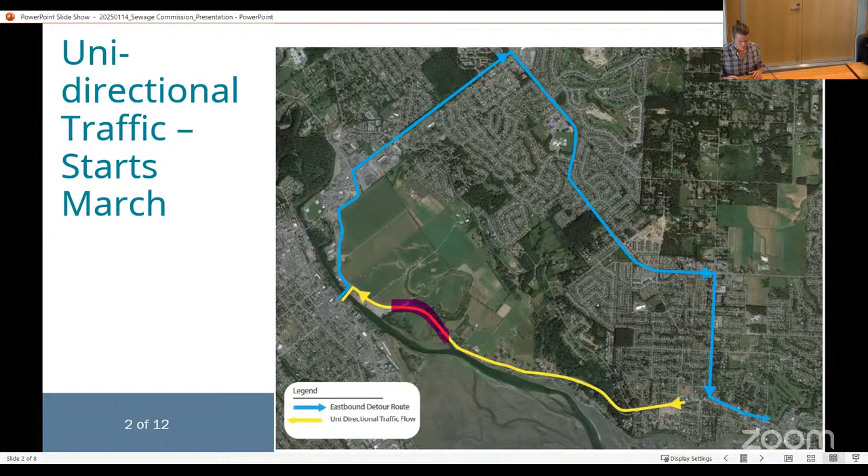One of the recommendations of the report is focused around Back Road. There's obviously been a huge amount of communication around ensuring that Back Road is not used as a detour route, to mitigate additional traffic from people trying to avoid the official detour and using Back Road instead.

When we were communicating out to the public on this, we had planned to close the intersection of Glacier View Drive and Comox Avenue. This is a snapshot from our approved traffic management plan. One of the recommendations is to delay that road closure at Glacier View Drive and Comox Avenue.

When we first envisaged this, we expected to be working up on top of the hill there at the start of the commencement of the unidirectional traffic. Now that we've adjusted the construction sequencing to start our work at the far western end of the corridor, there is no construction need to close that intersection.

I'm sure you're all aware that we'll be building a roundabout up at the top of the hill later this year. But until our contractor arrives at that location, if we close that road in advance, we'll be severely impacting the ability for Comox First Nation to flow back and forth between the two halves of their community, as well as for other folks navigating that area.

Closing roads where there is no nearby construction will cause a lot of angst in the community. So there's a recommendation to modify the approved traffic management plan to delay the need to close that intersection until either we need to for construction reasons, which we believe will be more like May or early June, or if the shortcutting through back road becomes an issue, at which point we would close it to reduce the flow on back road. That's the main recommendation in the report.

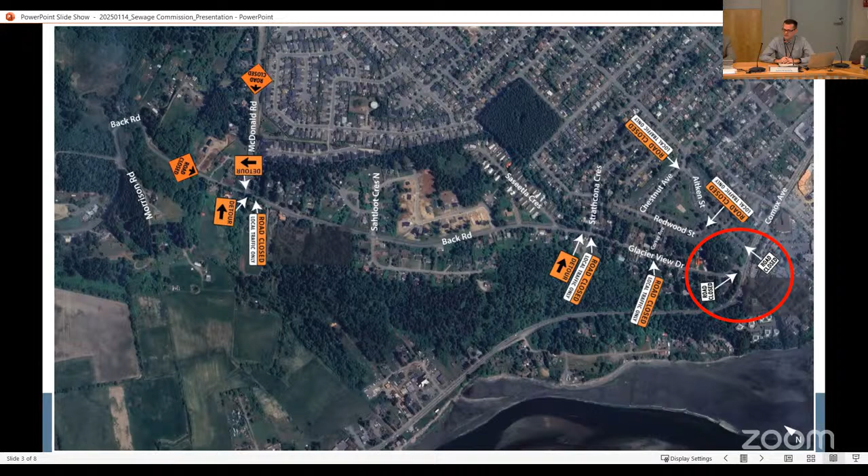May I add to that? We will be providing objective answers to those concerns as well. So, for example, if a concern is raised from a resident that lives on a certain portion about increase in traffic, we can say, we have models to suggest that it has increased by 30% where you are, yes. But the traffic has actually not increased by that same amount at the other end where we were proposing to close the road. So that traffic is actually flowing past your house up McDonald, for example, and closing the road at Glacier View Drive and Comox Avenue would not have that desired effect. So we will have very objective data to respond to concerns from the public. It's not a matter of us being very wishy-washy on all things. It's a matter of not setting a very hard trigger in the sand for implementing something that will provide more pain than gain—that's the rationale.

Thanks for that. And Director Cole Hamilton.

Yeah, thanks very much, Chair. Building on that, I think the CAO's answer was roughly what I was looking for. I'm just hoping that, obviously it's not a quantitative process, but if we can get a clear sense of what the qualitative factors are and what we're going to be looking for—I think we just want to show that, while we don't have a number in mind, we have thought specifically and clearly about what we're looking for, what we're looking at, and when we'll take action. Otherwise I think it risks being viewed as arbitrary or too subjective by members of the public. So having those talking points and listing out the qualitative factors would be really helpful to communicate this. Thanks.

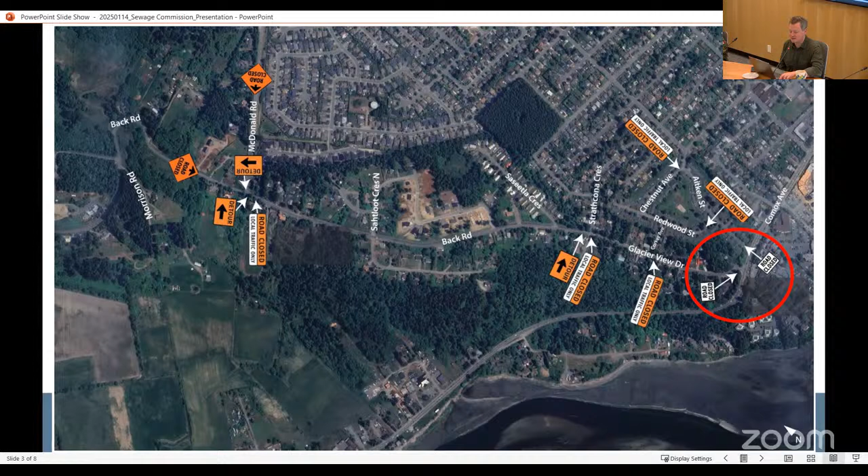Thanks for that, Director Swift.

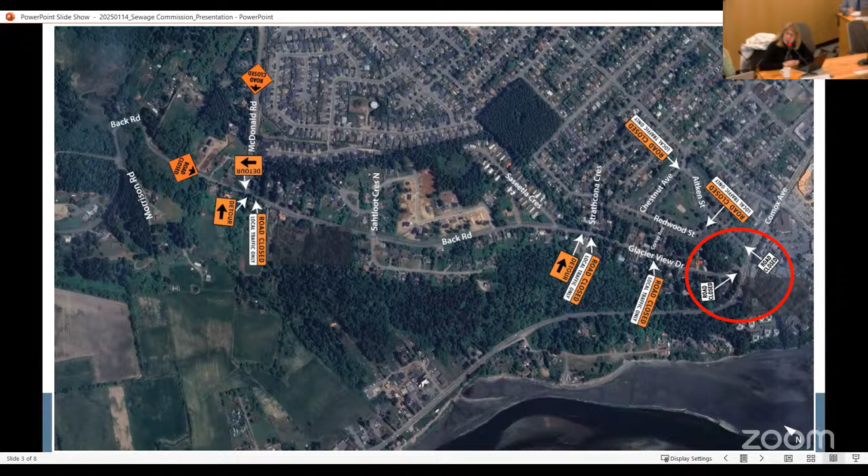I'm just wondering if I could have a reminder about how long we're anticipating the traffic to be unidirectional.

So the original traffic management plan contemplated for the majority of 2025. At this stage, we're only starting in March, so we're starting a couple months later than expected, and it is planned to run through till the fall. We are expecting to complete our force main work by the end of summer, but there will be other works, paving, final works, as well as the roundabout up at the top of the hill, which delay that into the fall of this year. So it's March until, say, October in the current plans.

However, within that larger time, you will have, for example, in March and April, you'll be able to free flow back and forth on the eastern end. And then after May, you'll be able to go free flow from Courtenay up to IR1 and back continuously. So there is some nuance, but for the general public doing the circuit, if you're coming from Comox to Courtenay for work, it will be March until October. And if you're going from Courtenay to Comox, you'll be going the Ryan Road Lerwick route as of March.

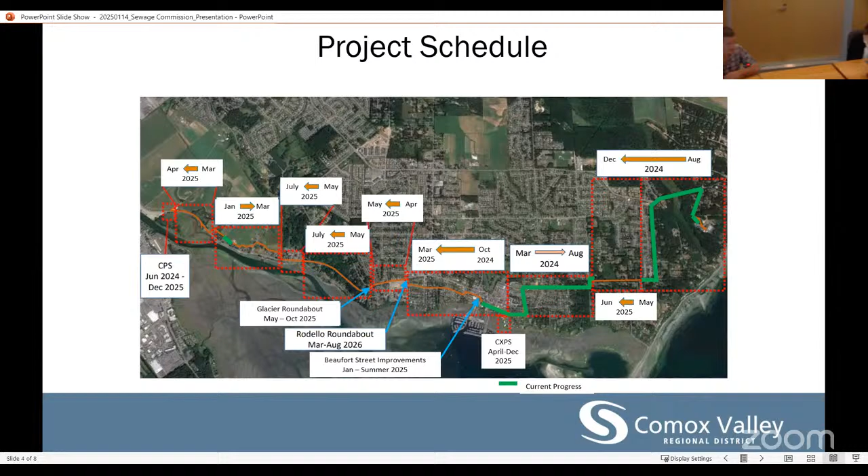Yes, and that is addressed in the report. We have approached Comox First Nation about this change to the traffic management plan, because this specific closure at Glacier View Drive and Comox Avenue really affects them the most, since you could have all the traffic flowing up McDonald and going around if it's closed. So they have indicated they're supportive of leaving it open, as long as we have the ability to react if they are saying this is becoming unsafe. We're seeing a huge amount more people coming through the reserve. So yeah, they have had input in this, and their request is just that we are able to react relatively quickly if they identify a safety issue in the reserve up on Back Road.

Thanks. All right, thanks, Charlie.

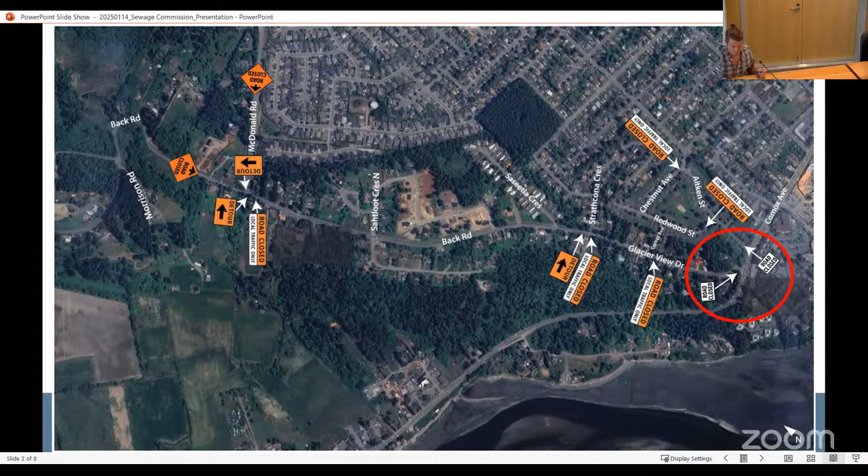No more questions or comments, so we'll vote on receipt. Is there anyone opposed? That's carried, and we have a recommendation that the traffic management plan as outlined be modified to delay the closure of Glacier View Drive and Comox Avenue intersection, and further that the CAO be authorized to implement the intersection closure prior to that if needed. Moved by Grant, seconded by Swift. Questions or comments, discussion? Is there anyone opposed? That motion is carried. Thanks very much, and thank you, Charlie.

And we shall move on to item number 5, the sewage conveyance project construction progress dashboard. A motion for receipt, please. Moved by Grant, seconded by Cole Hamilton, and back to staff.

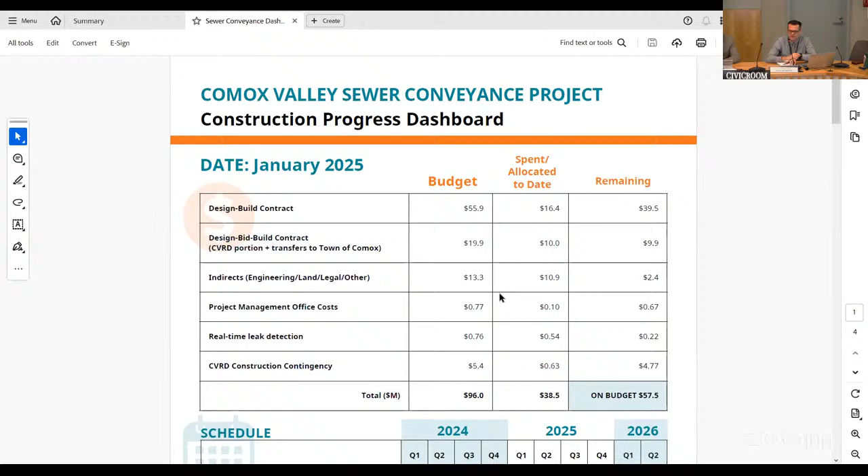Just before turning over to Charlie again, I wanted to note Ingrid Sly is in our audience here today, and Ingrid is our communications lead for the conveyance project, working with Charlie closely on all things communication. So Charlie, I think you're introducing this report, but I wanted to acknowledge Ingrid is in the room also. Thanks for that, and welcome, Ingrid. I'm tempted to ask you to say a few words so we can check out your communication chops, but perhaps we'll spare that for today, and look forward to working with you through this year. Over to you, Charlie.

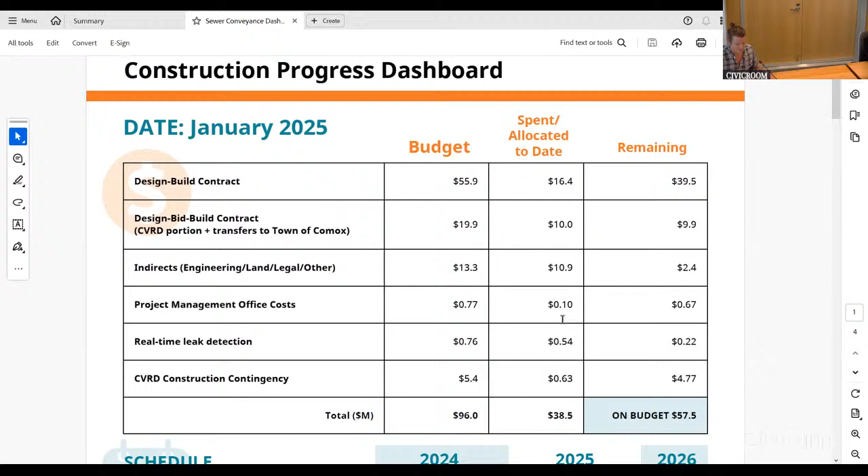Thank you, Chair. So this is our dashboard update. You can see that the monies are ticking along. We're very much on budget on the project, which is great news. But what we're starting to spend is approaching that 50% value, so we're really into it now. We're definitely building a project.

The schedule as a whole, nothing has changed. The commissioning plan for early 2026 is still in play. You may have noticed Courtenay Pump Station hasn't moved a lot, a big hole in the ground out there. They're working through some serious groundwater issues with the contractor, and they're doing a good job reacting to the differing way the groundwater is operating down deep underground for them to dig that very deep hole. We're holding schedule on all the other parts of the project. At the moment, things are going really well.

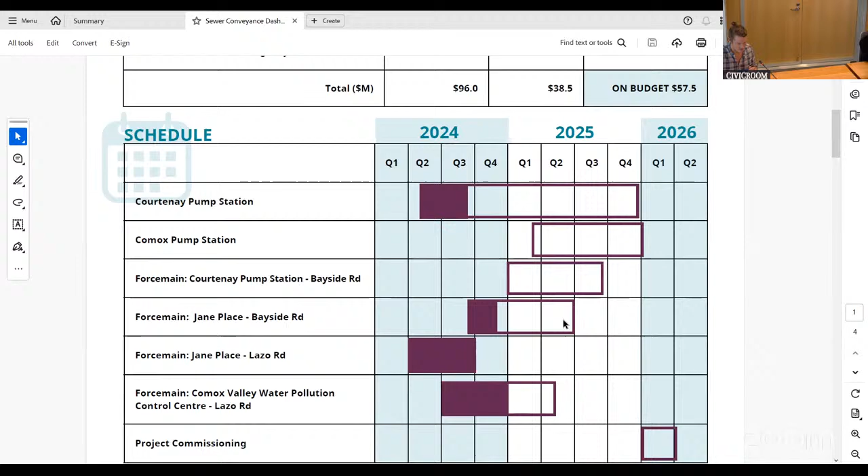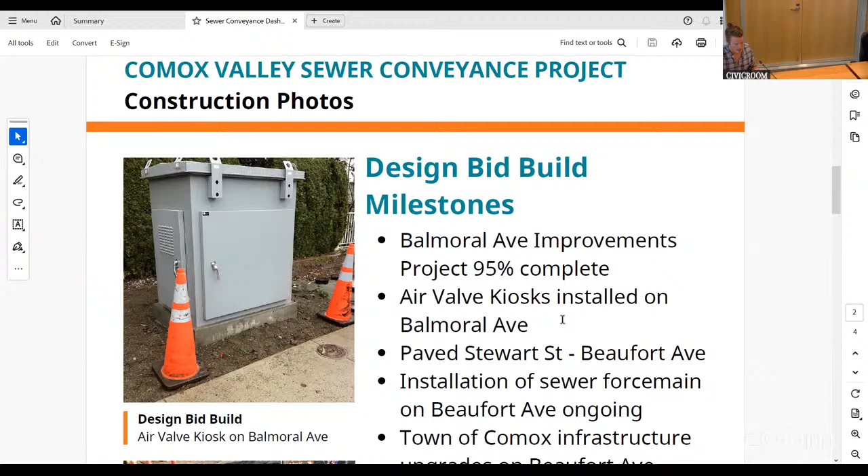There are several photos and some milestones for the different portions of the project. So the design, bid, build milestones, which is the portion within the town of Comox. For those who have been out there, you'll notice that the improvements on Balmoral Avenue are almost complete, and all the paving in that area is now done. We've moved the large construction crew to working west in downtown Comox.

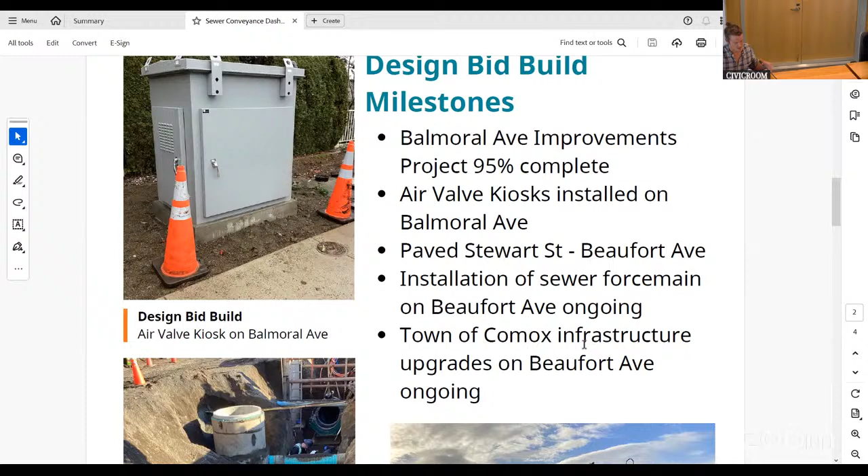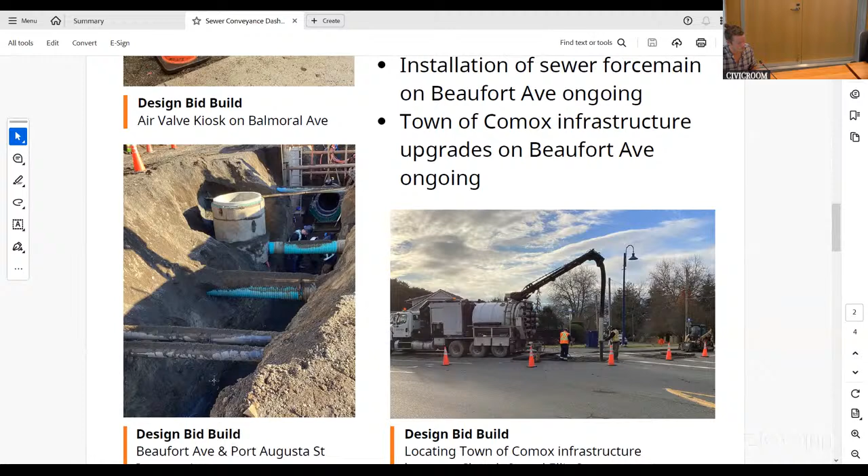You'll see some of the really tricky underground conditions we're dealing with. Here's a photo from the Port Augusta intersection, where we're threading our pipe underneath all of those existing services. It's a very complex undertaking, and we really appreciate the collaboration with the staff at the town of Comox, who've been fantastic in helping us work through all the issues you can imagine, digging up that deep under very old roads that haven't been disturbed in 100 years.

On the design build side, we've finished up the work in the Lazo Road area. We didn't make it all the way to Torrence; we made it to the top of the hill by Forester Butcher's area. They'll come back to this area in May once the paving plant's open. We didn't want to leave a section of this road open and gravelly over the winter, as it would be a nuisance to the public, so we stopped the install at the top of the hill.

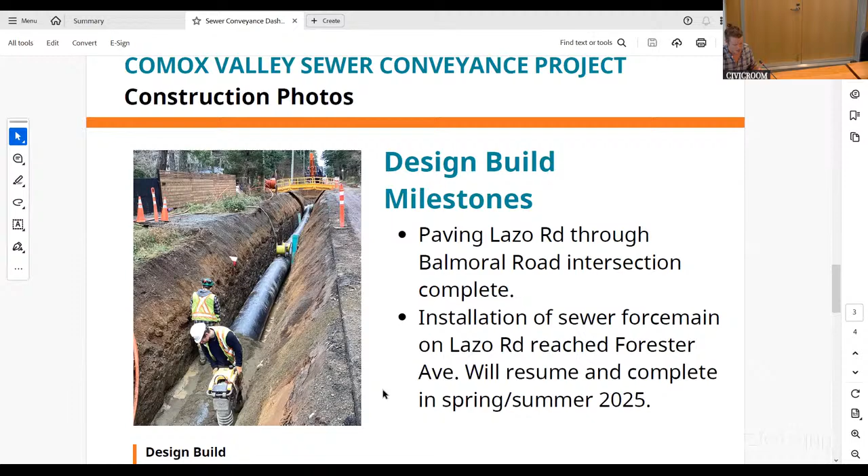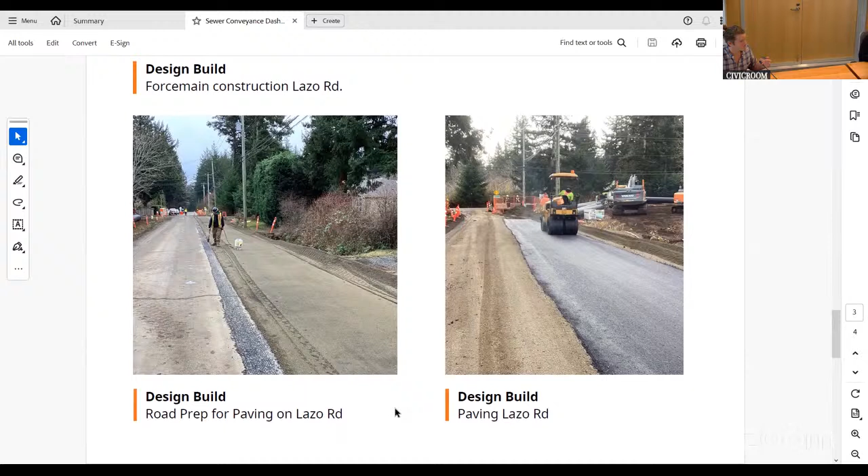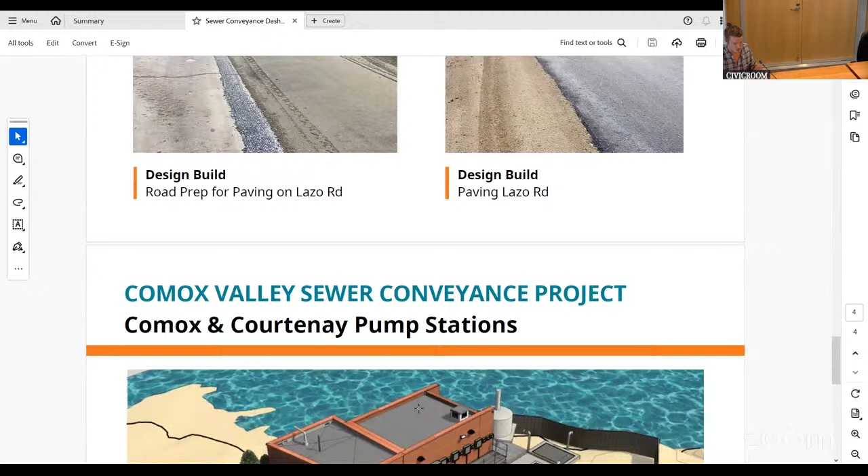They'll come back and do that last little leg in the spring. You can see some photos here of the road prep and fresh paving up there. Next month you'll see photos of the work we're doing now that we've moved down to Farmview Road on the dike, and all the complexity of working down there. We're starting to really see some of the complexity of working around the old village sites of the Comox First Nation, and the archaeological side of this project is starting to come to the fore.

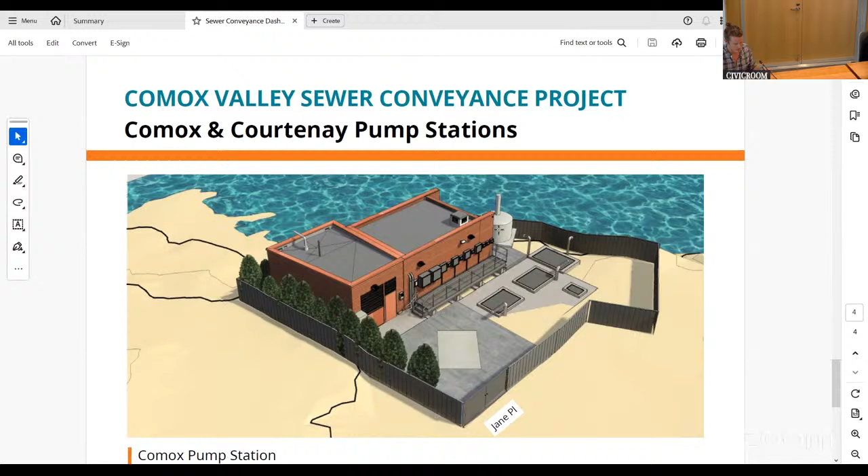We also really wanted to bring attention to the designs for the pump stations. You can see here the rendering of the Jane Place pump station, an extension of the building in the same form, height and function of the existing building shown here, as well as an additional odor control unit, which is a carbon scrubber, to make sure there are no odor concerns coming from the facility.

Similarly, you can see a rendering here of the finished Courtenay pump station. Comox Road is off to your left in the picture, and it's a large two-story building, due to the flood construction level we're designing for. This is a climate change resilient facility where everything up to this second story can be fully submersed and flooded, so we can handle the things Mother Nature will throw at us over the next 80 years and keep this station fully functioning.

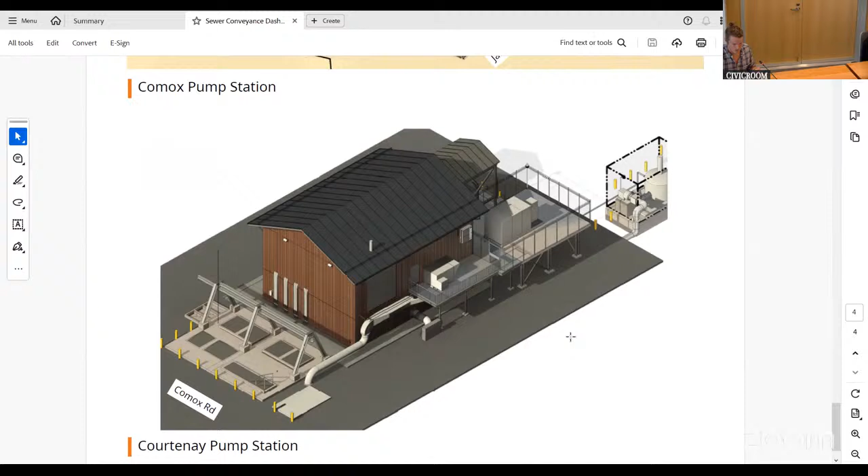That's it from me for the dashboard update. Happy to answer any questions or concerns from the commission.

Thanks, Charlie. I take it there's no room for a sanding dump at either of those pump stations. I get in a lot of trouble from the contractor every day when I go out to the Courtenay pump station site about how little land we bought for them. It's a very constrained site. So no, Chair, I'm sorry.